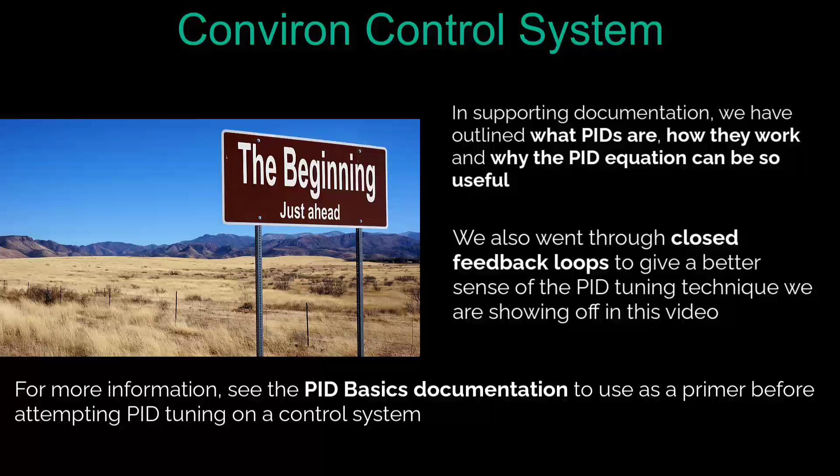on a control system. Today we're going to show step-by-step how to tune a Conviron control system and explain the advantages of using this approach versus traditional tuning techniques.

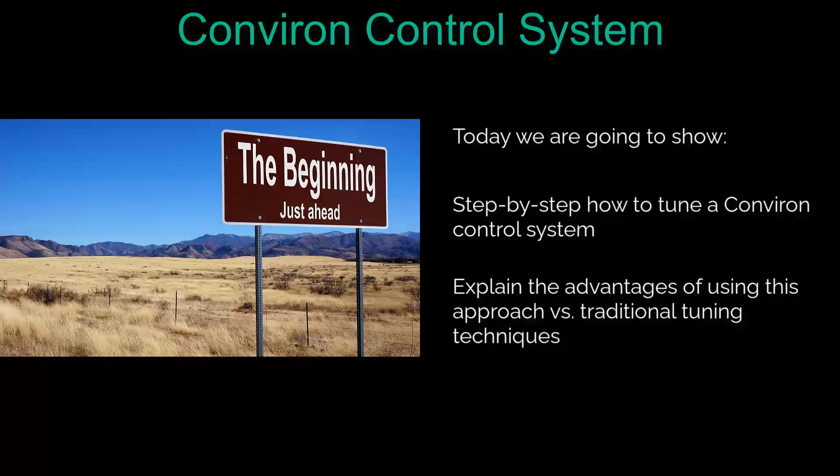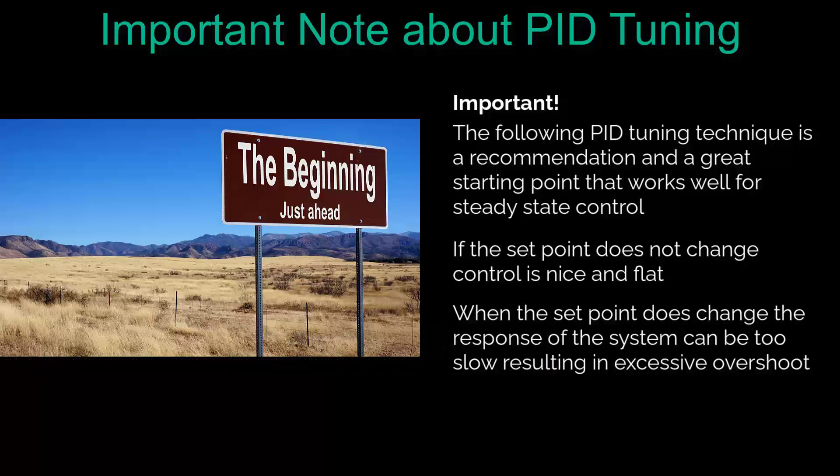Important note, the following PID tuning technique is a recommendation and a great starting point that works well for steady-state control. If the set point does not change, control is nice and flat. When the set point does change, the response of the system can be too slow, resulting in excessive overshoot.

Once you reach this point, the PID values will need further adjustment to dial in the responsiveness of the system. Any subsequent adjustment comes down to experience and differs depending on the system being tuned.

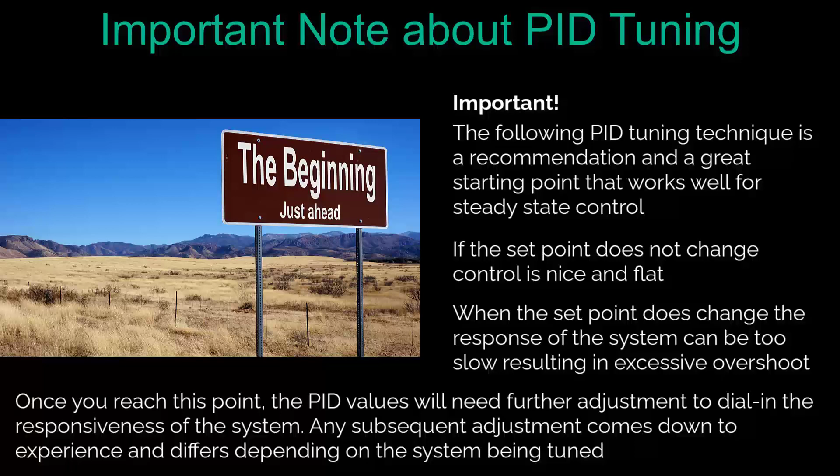Step-by-step approach. This approach is easy to use and works in any situation. If it's performed correctly, it's always successful in tuning control systems. It's much more focused than other current techniques, so think of it as using a sniper rifle versus using a shotgun approach.

A good rule of thumb is about 3/4 higher than your actual reading. If we have a range of 0 to 50 degrees, and your reading is about 20 degrees, then 3/4 is about 40 degrees.

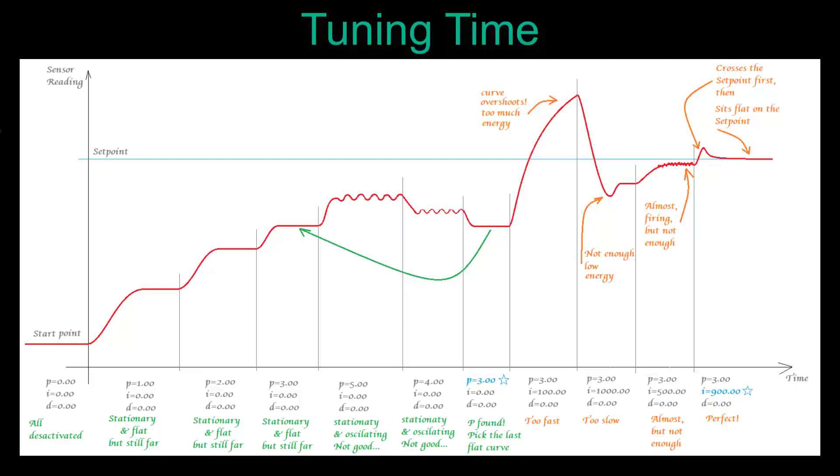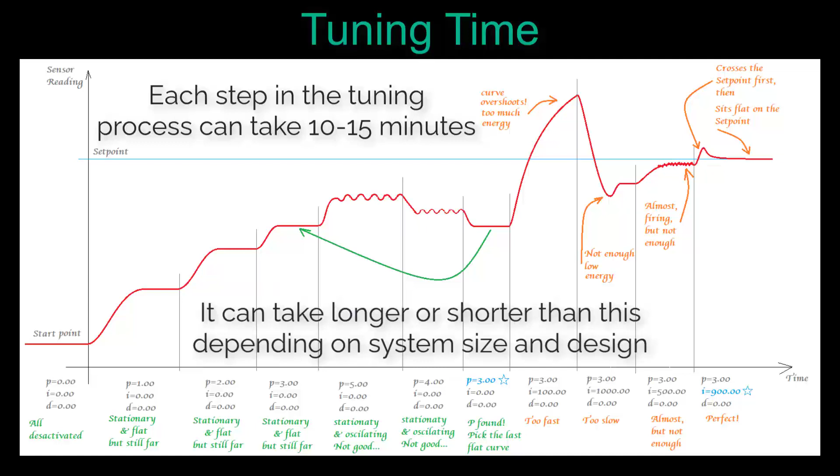Please note, each of these steps takes around 10 to 15 minutes depending on the size of the system you're affecting. It may take longer or shorter to react depending on the size and the design. This can be done for any closed loop controller that's giving you feedback from a closed loop, and you can

control that reaction. When you start this technique, you follow the trend graph for the outputs as in the diagram shown, because the trend graph will guide you through the various steps until the right equation is found.

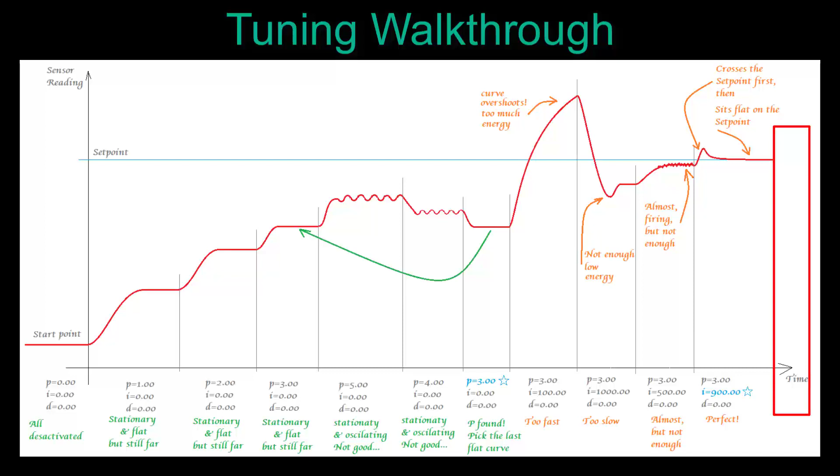The idea is to start at 0, find your proportional or P value, then find your integral or I value, and then finally find your derivative or D value if applicable. A first step is to deactivate the whole equation by putting the P, I, and D to 0. Run your system and get a flat reaction with all values at 0.

A second step, now you can start to find your P value. Set P to 1. The PID starts to react and output puts some effect on the system. Curve starts moving towards the set point, but will go stationary at some point before getting to that set point. It will stay flat at this point until you change the P value again to 2.

Please note, when raising P, normally it's smart to start at 1 and raise it by 1 or 2 each time. These are standard increments. The third step, you increase P to 2. Same as before, it will start moving towards the set point and go stationary again.

The next step is to increase P to 3 and watch as it moves towards the set point but still quite far off. Advance P to 5, wait for it to go stationary, but in this example, we see it then starts to oscillate, indicating it's gone too far.

We reduce P back to 4, wait for it to go stationary, and notice it's again oscillating, indicating it's still too high. We reduce it again to 3, and once stationary, it finally stays flat. Next, we add to the I value.

Please note, when increasing the I value, smaller values will add larger amounts of energy, and larger values add smaller amounts of energy. First, we increase the I to 100, and we notice the curve overshoot the set point, as too much energy has been added.

We increase I to 1000 to pull it back, and it will drop below the set point reading, but we notice it's too low. If we decrease I to 500 to ramp it up a little bit, not as much as 100 did, we notice it goes up closer to the set point, but not quite enough.

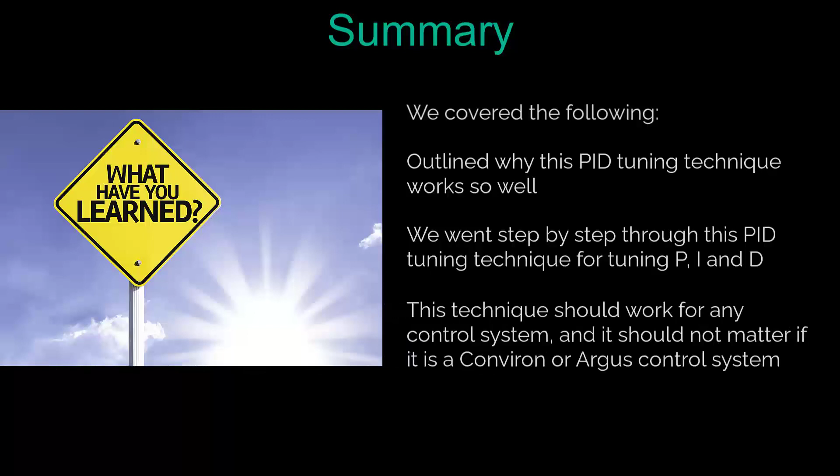Summary. We've covered the following. We outlined why this PID tuning technique works so well. We went step by step through the PID tuning technique for tuning P, I, and D. This technique should work for any control system. It shouldn't matter if this is a Conviron or Argus control system.